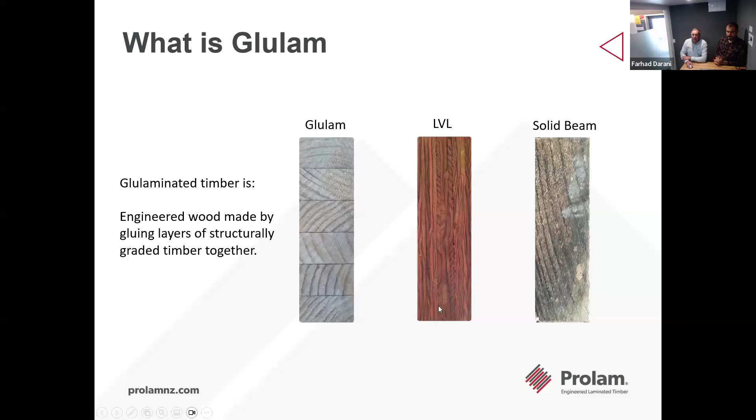So what is Glulam? Glulam timber is engineered wood made out of gluing layers of structurally graded timber together. So we've got a Glulam example here, we've got LVL, and then just our solid standard timber.

Just a bit on log procurement - logs are sonically tested to ensure the best recovery in the structural lumber. This tool has been developed in New Zealand. The speed of sound through wood provides a direct measure of stiffness. So we specify a log grade of 3.1 kilometres per second - that's the speed of the sound going through the log.

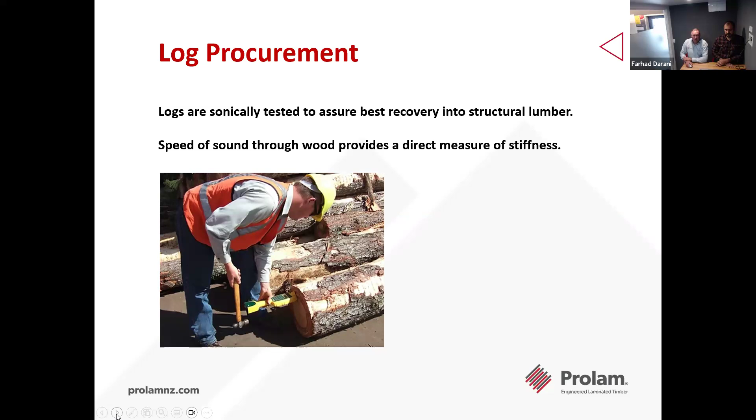Similar to LVL, they specify a high sonic log as well. Nelson, top of the South Island, is a really good place to get highly sonic logs, same as the top of the North Island. So we do have a great resource on our doorstep.

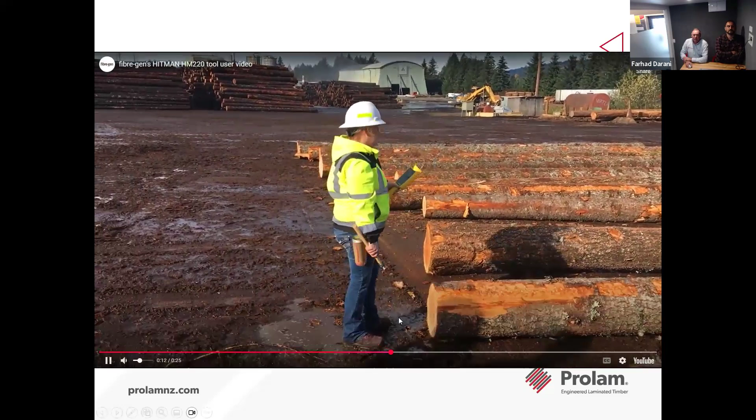Here's just a little video of them testing logs. They'll mark the logs with a different colour for the different grades - it's just a hit on the log and it reads the sonics through the tool, and away you go. So they'll mostly mark the high structural logs and separate them out and send them to the mills that specifically require the high density logs.

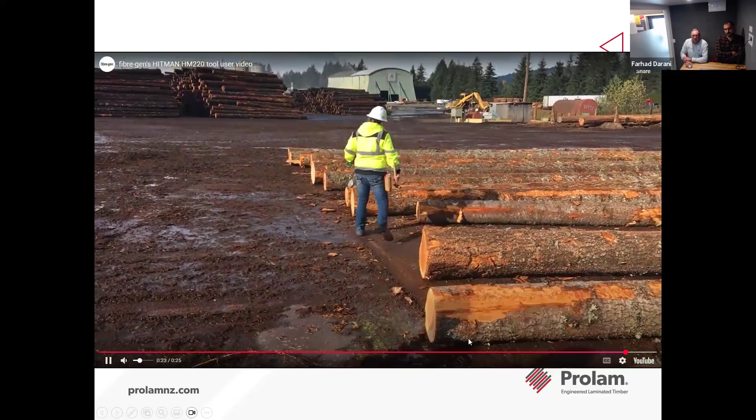Log processing, so logs are cut through a mill into the required sizes and then filleted ready for kiln drying. This is our little head rig here. There's a chipper canter here which grinds off the side of the log, and then our bandsaws in behind.

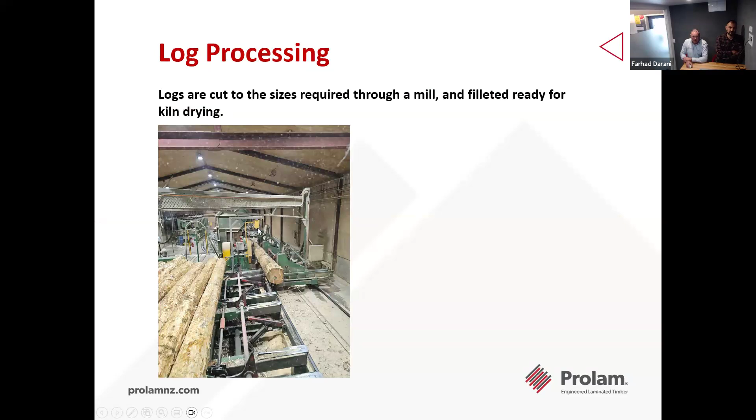Kiln drying, so our timber is kiln dried to a moisture content of 12 to 16%, either in a batch kiln or in a continuous drying kiln. This is a continuous drying kiln in here.

This is an in-feed, and it just has a hydraulic ram in the bottom that pushes that loaded timber through every half an hour. It pushes it about another 300 millimeters, so it gives it a real nice gentle dry, because in the first section of the kiln, it's got no heating coils, it's just got fans blowing air around.

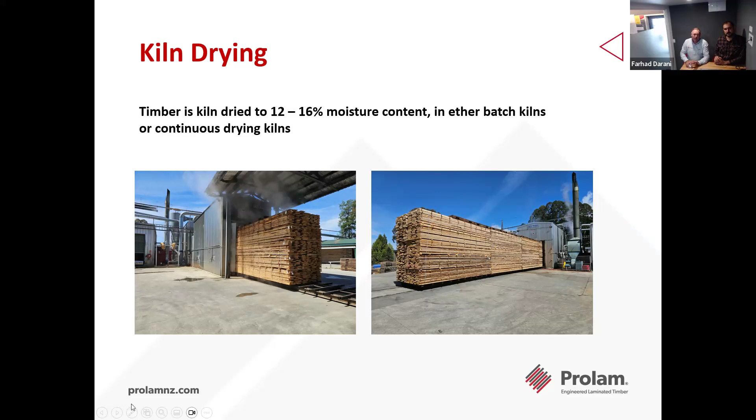There is a bit of heat there that escapes back out of the actual kiln drying portion of the kiln, so it warms it up really nice and gently, and same on the outfeed on this picture. You can see the steam coming out here, so that's where it reconditions the timber as it's on the way out.

Optimisation, so this is where we cut the lumber into specific structural and visual grades. We have SG 12, 10, 8 and 6. So number one, we put a structural profile over the board, then a moisture content profile over the board, and then a visual profile over the board. It's not till that point that we decide how we cut this board up to optimise the timber out of it.

So this is just a picture of the structural profile of a single length of timber. There's 37 points that are graded here, and every one of these bars is like 140 millimeters of that length of timber. So you can see the huge range we have in the structural portions of a single stick of timber.

And that's because we're dealing with a living product, as timber is. The highest grade here got up to an SG 17, and the lowest was an 8.9, but the average was a 13.35. So we cut out portions of that lumber, so everything above an 11.5 would go into SG 12, and then we'd pull some 10 out, and then there'd be some 8.

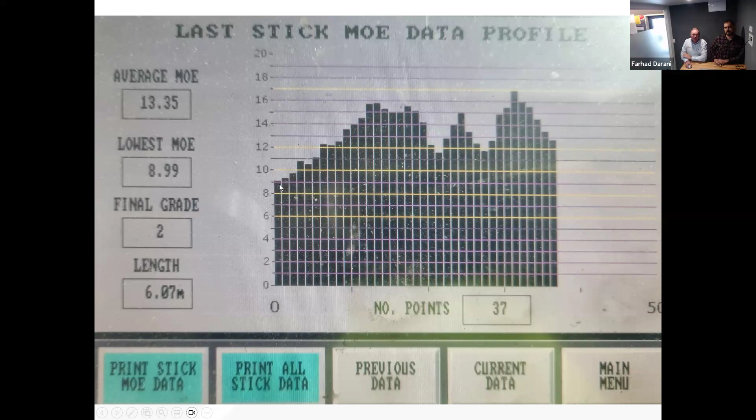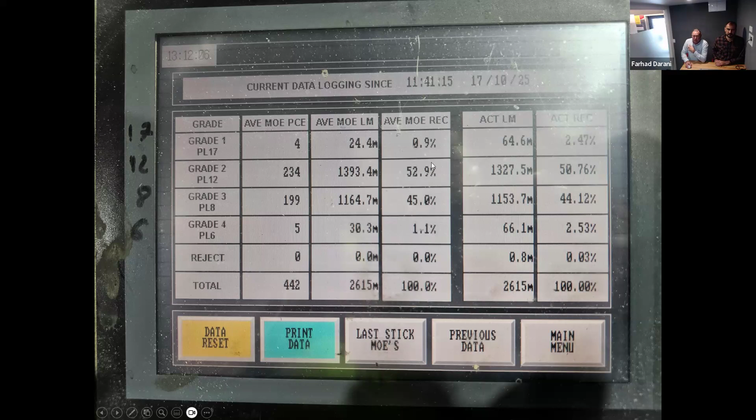And then this is the average of a run, so on this one here, we're getting 52.9% PL12, 45% PL8, and 1.1% PL6, and a tiny wee bit of PL17.

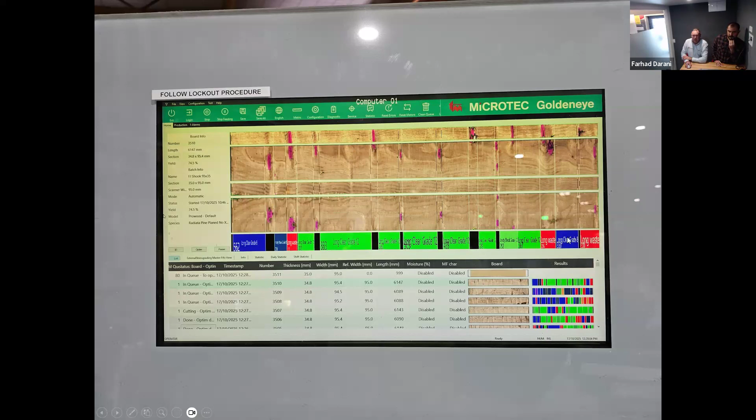And then this is our visual scanner. So this straight line LED here is picking up the visual grading of the board, whereas this dot grader here is picking up the grain deviation. That's really important for our finger jointing, because we don't want the grain on an angle no more than 12 degrees for finger jointing, to keep the structural strength of our finger joint where it needs to be.

So then we come to finger jointing. Timber of the same structural and visual grades are then finger jointed together to the correct length using glue for the correct service class.

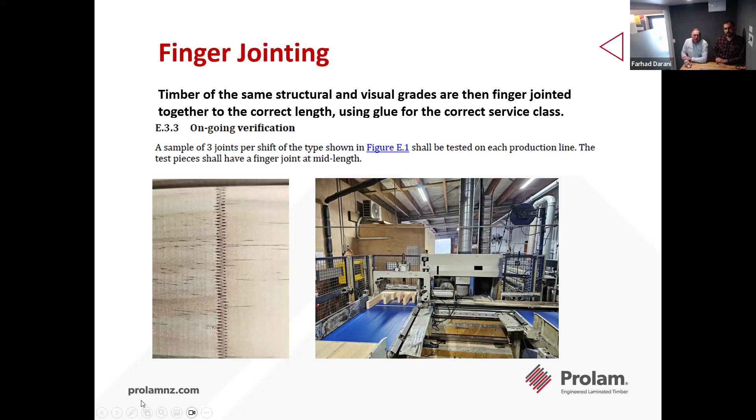So we do some ongoing verification here. We're sampling 3 joints per shift, and each is tested in each production line. So I've just got a little bit here on our production record.

These are the records we keep every day for our quality control: date, species, grade, moisture content, the resin type and hardener, the manufacturer of the glue, the batch number, expiry date, the service class type, clamping pressure on the finger joiner, adhesive spread in grams per square meter, service class, and then a gel check. We use a 2-pot glue, so we do a gel check on the glue every day to make sure the batch is going off.

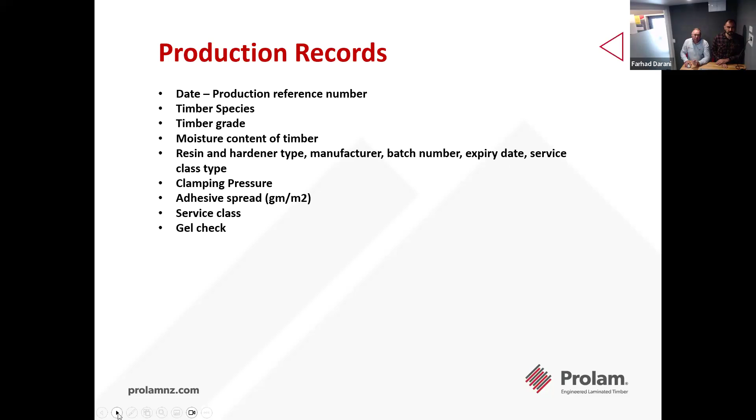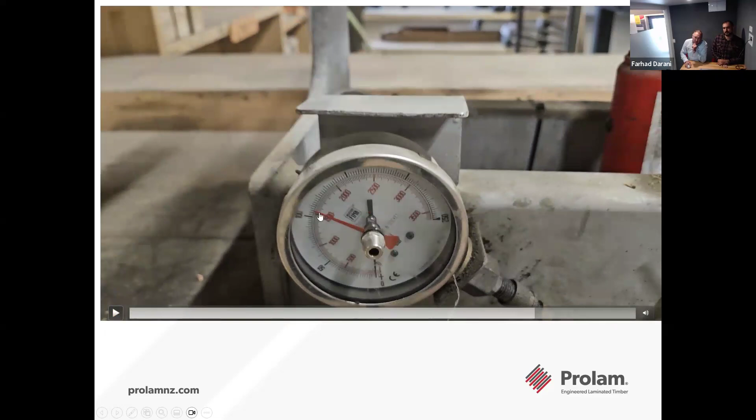And we have our chart up here.

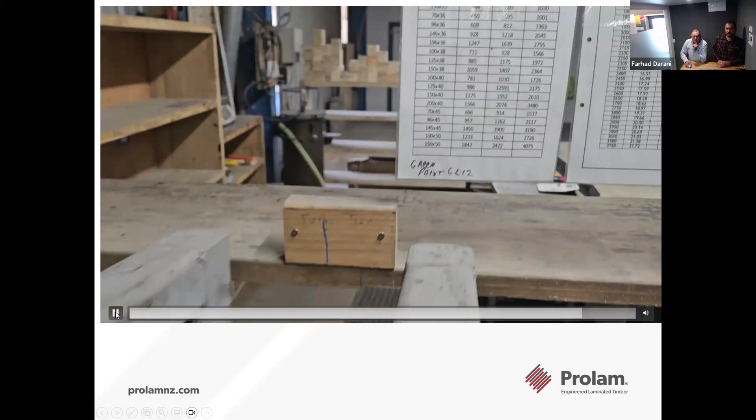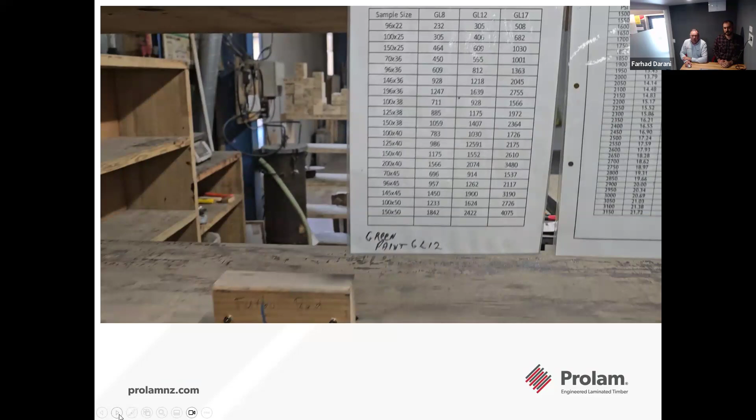So that size was 96 by 36. For the GL8 grading, we needed to break at 609 and we broke at 1500. So that just shows that we're above, quite a bit above where we need to be for our breakage.

Coming to treatment. Timber is treated in a pressure vessel to the required hazard class. So we've got MCA or CCA for H3.2, H4, H5 or H6, and then we have the boron treatment for H1.2.

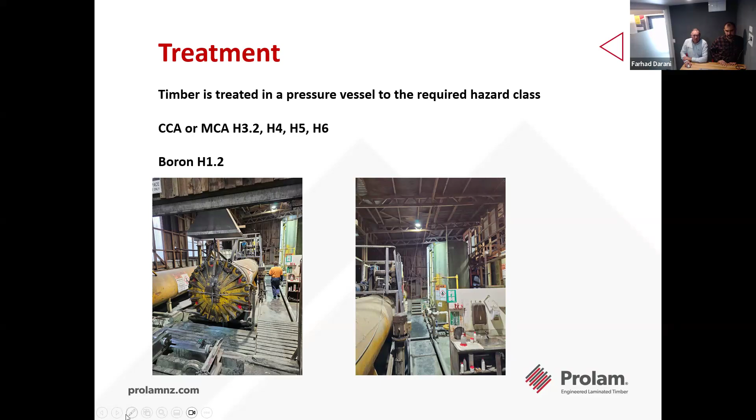So these are the pressure vessels here. These are the working solution tanks that get pumped into these vessels with the timber in it. And then that's our compliance report we get from IVS. For every 30 charges we put through, we have to do a sample test of 10 boards.

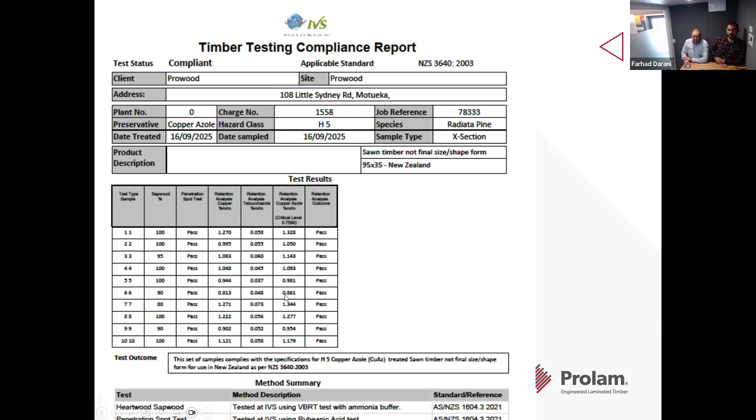So these all passed here, and the minimum we're allowed for chemical uptake is 0.75. So we always aim a little bit above where we need to be there.

So this is a treatment penetration test. This is looking for penetration of the chemical into the blocks of timber.

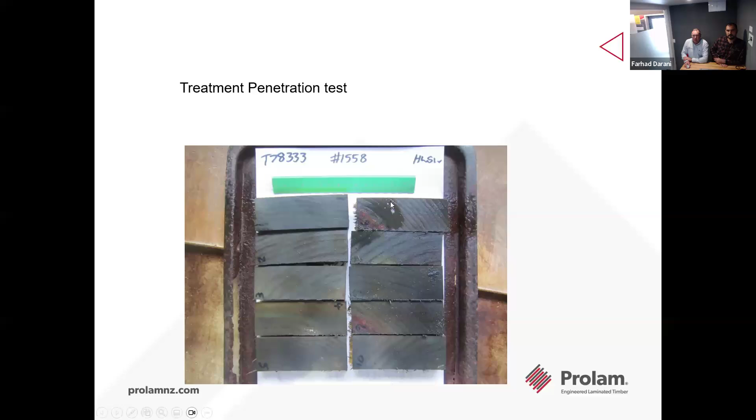And then this is looking for heartwood and sapwood. So they've marked where the heartwood is here, or more like transition wood, really.

And then we have to re-dry the timber after it's treated. So we're re-drying it back again to a moisture content of 12 to 16.

And this is a little overview of our continuous drying kiln. So this is your preheat end coming through here, and this is the proper kiln section in the middle here, and then a conditioning section on the way out here.

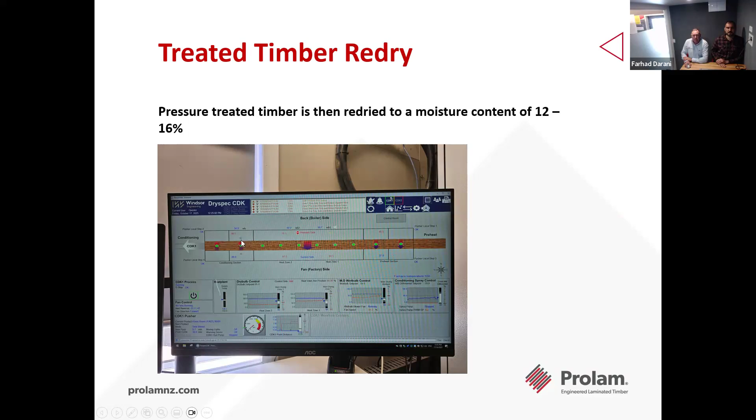Coming to lamination, finger jointed blanks are then machined, glued and clamped for the required length of time to cure the glue. And these are just a few examples of different ways we can laminate.

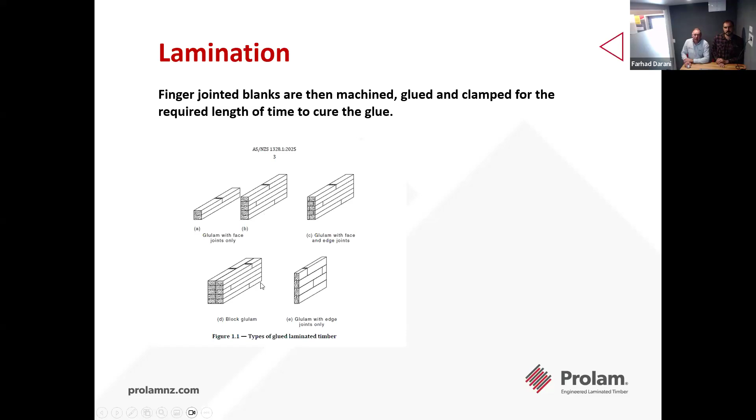And then, so our production records for the lamination process are fairly similar to finger joining. We're taking thickness of the laminations, the moisture content again, resin, the start time of the adhesive application process, and the start time of clamping.

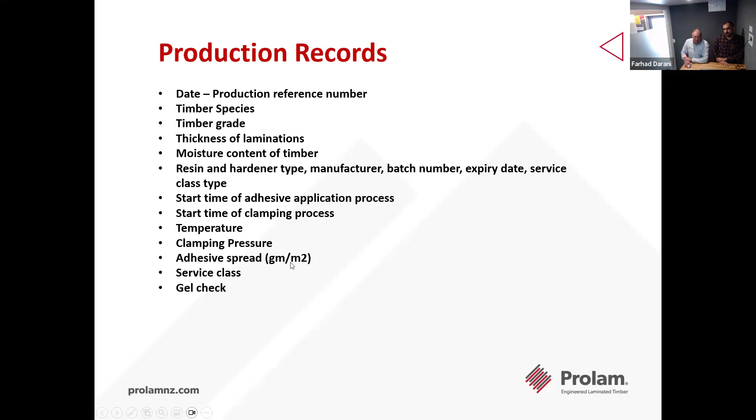So that's quite critical for us because we're using a heat cured glue. Depending on the temperature of the day, we've got to get it into the clamps within a certain time period. So we're taking the temperature as well, clamping pressure, adhesive spread, service class check, and a gel check again to make sure the glue is correct.

Just a bit on standard. So this is the old standard that had the adhesives in there, and it showed the service class 1, 2, and 3. Class 1 is for interior, class 2 is for exterior but protected, and class 3 is for exterior.

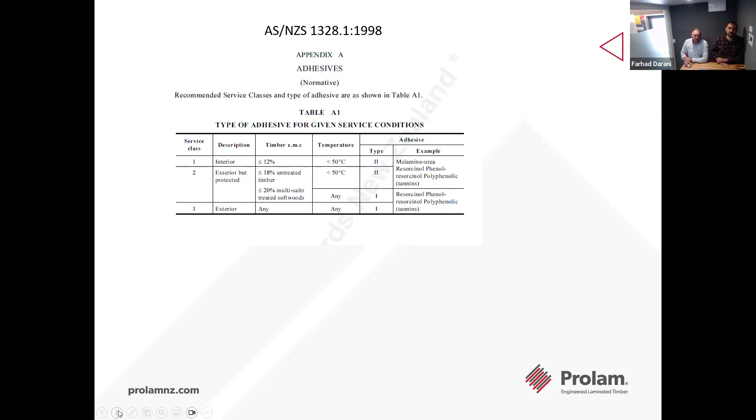And then it brings you moisture content and what have you there. So, bond integrity test method.

So this is for lamination. We're using, most of our product is service class 3, so we're using the delamination test method B, Appendix A.

So this is the test cycle. I won't bore you with going right through that, but essentially we have a pressure vessel where you fill it up with water. We put the timber in there, we pull a vacuum of 70 kPa to 85 for 30 minutes, and we release the vacuum and then pressurize it. And then we dry the pieces in an oven, and then we count the delamination from there.

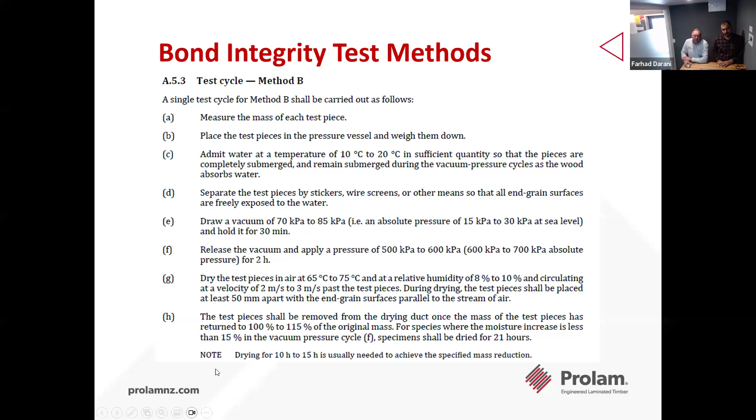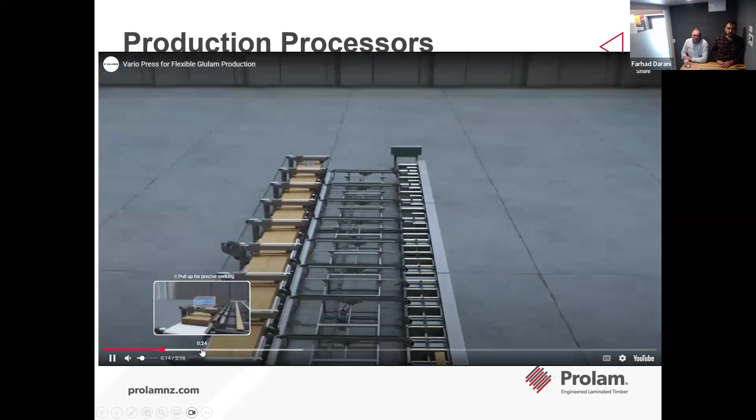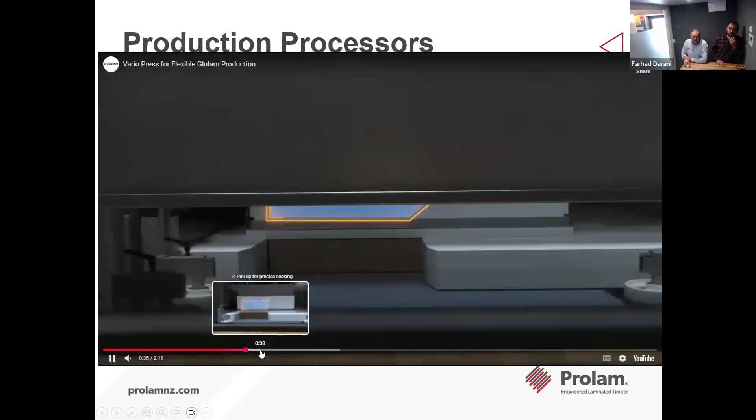I've just got a few videos here of different laminating processes. So this is a radio frequency press, which is what we have here at Prolam. It's laying up the timber on the infeed, and that's in the press here now.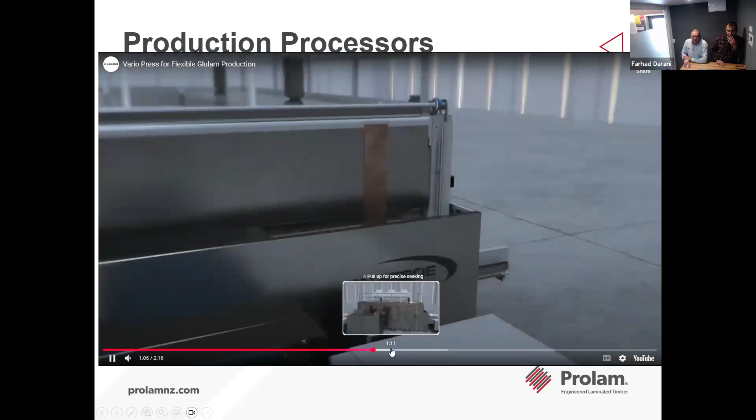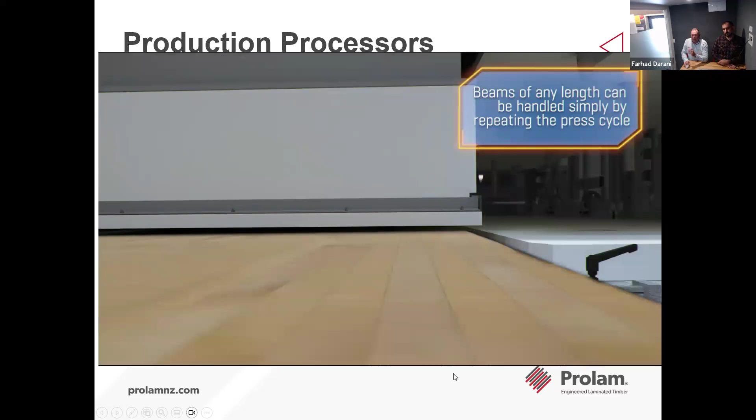Then this is the RF energy, just shows you a bit of the RF energy going into the press here to cure the glue. So it cures the glue, it's a bit like just a big microwave. It works on vibrating the water molecules into the glue and curing the glue, so it's not actually heating up the timber.

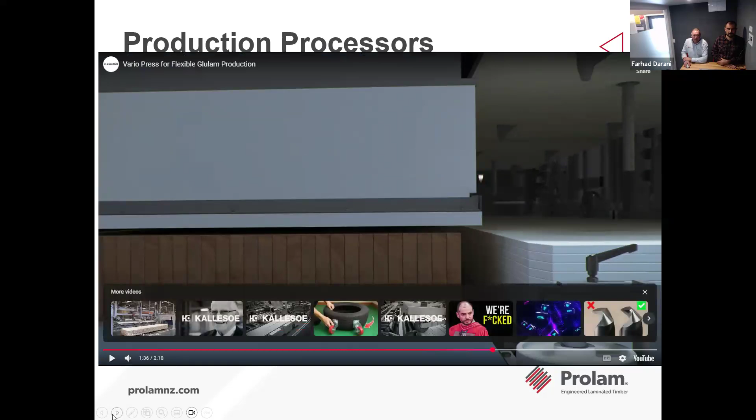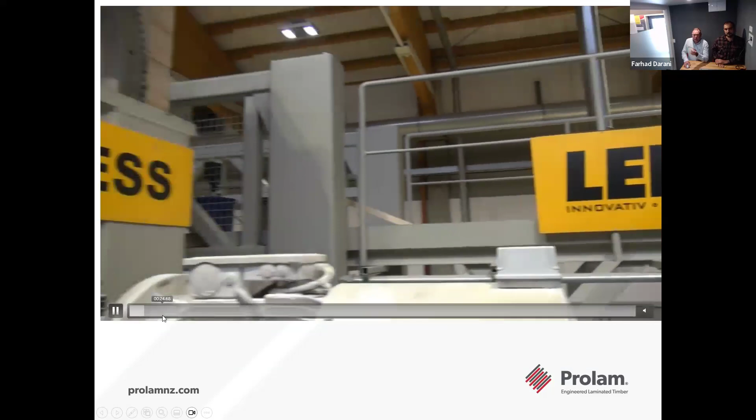This is another one from Ledinek. This is a cold cure press, it just cures the glue at the temperature of the room it's in, so feeding timber through a glue spreader.

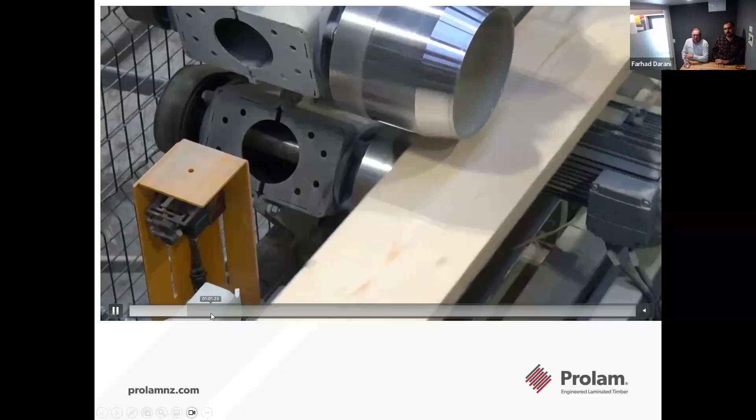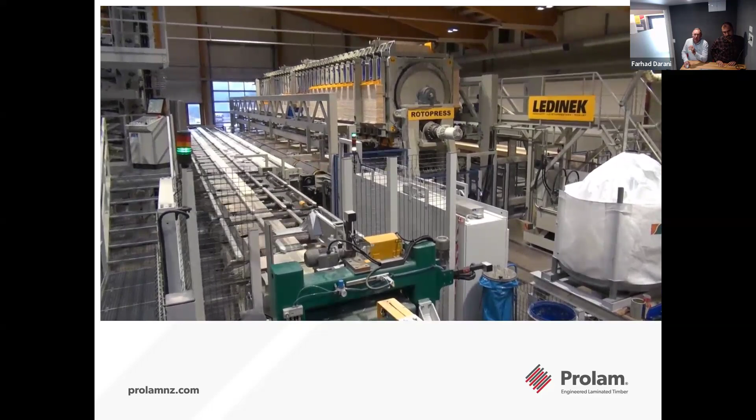It's fairly fast because these guys were using PUR glue, which is very fast setting but also has a very short open cure time. So you've got to get it into the press very fast and clamp it very fast.

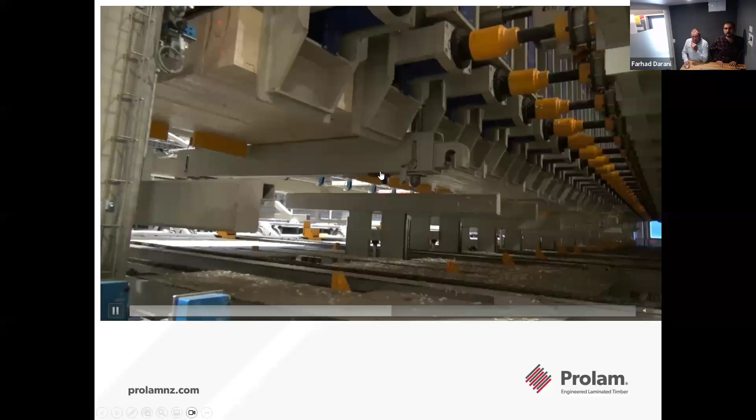So this is unclamping now. Oh sorry, no, that just finished clamping. So now it's turning this whole cylinder around, and the one on the fourth side, which will be coming onto the bottom, will have been fully cured.

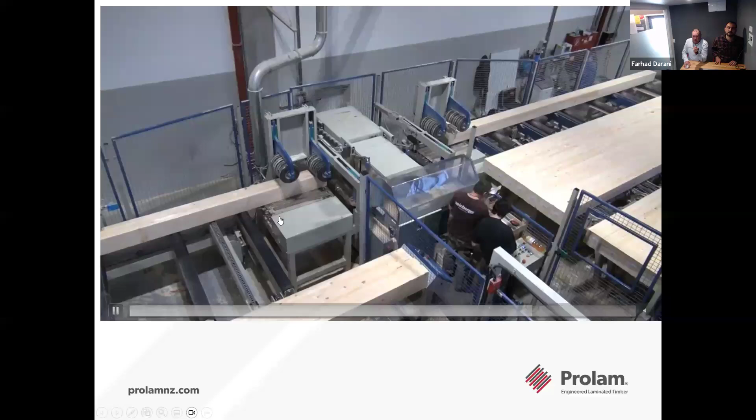This is the finished beam, or finished beams, coming out of the press and getting trimmed to length here, and then going down towards the finishing planer, like so.

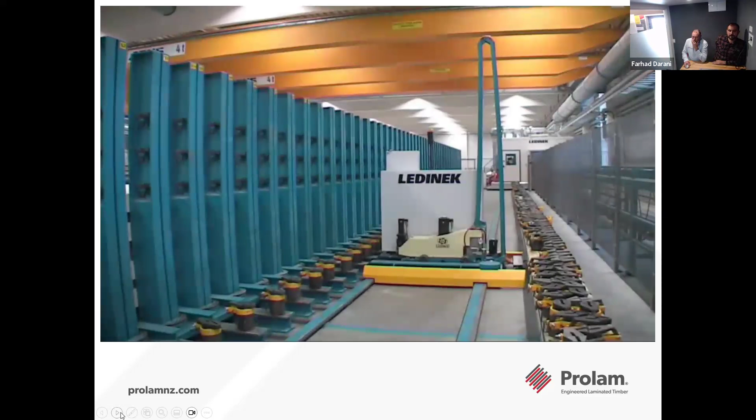So this is a different press. This is how they do curved beams. It's quite a long video, you better come back and look at this in your own time. But this is pushing the pillars into the right curve to make a curved beam.

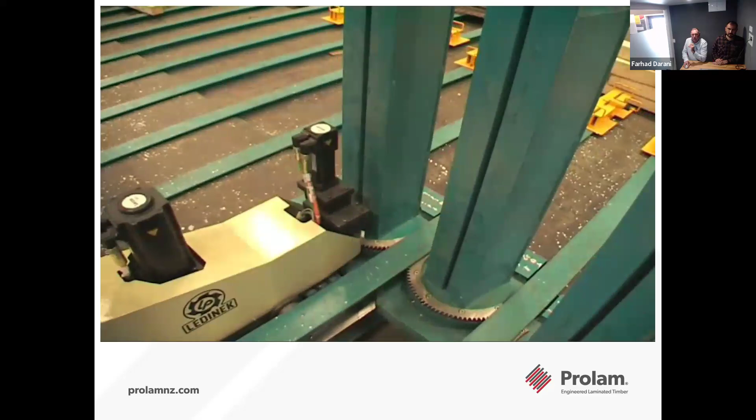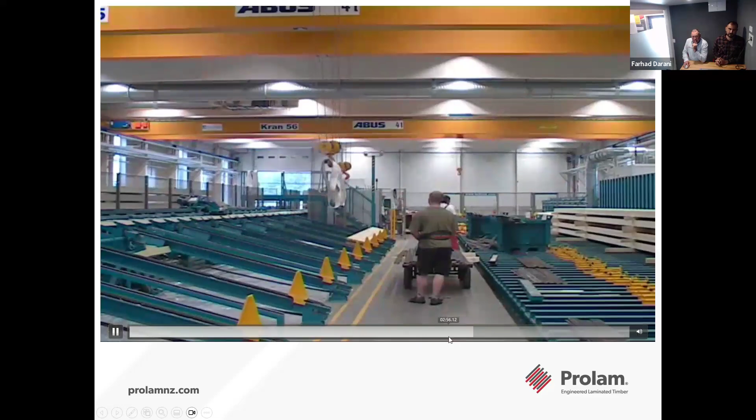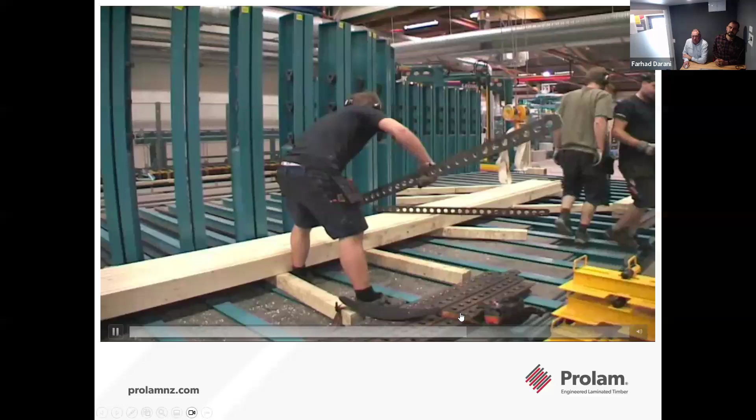This is building up the lamellas. So bring them into the press, and then curving, pulling that round with hydraulic clamps. Quite labour intensive - there's no real easy way to make curved beams.

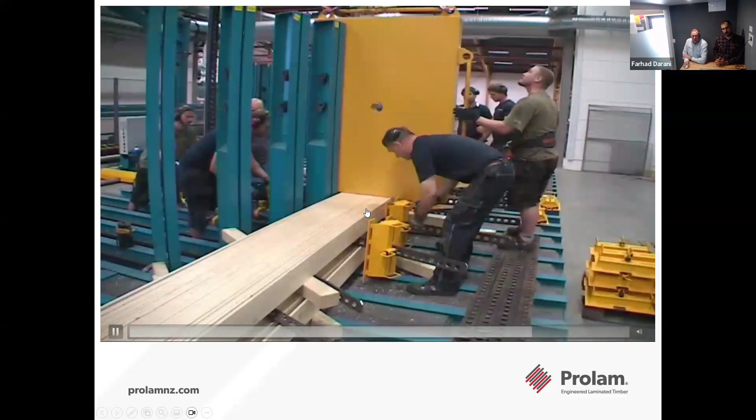See here they are doing up the bolts or the clamps, flattening the beam out and pulling the pressure on the beams.

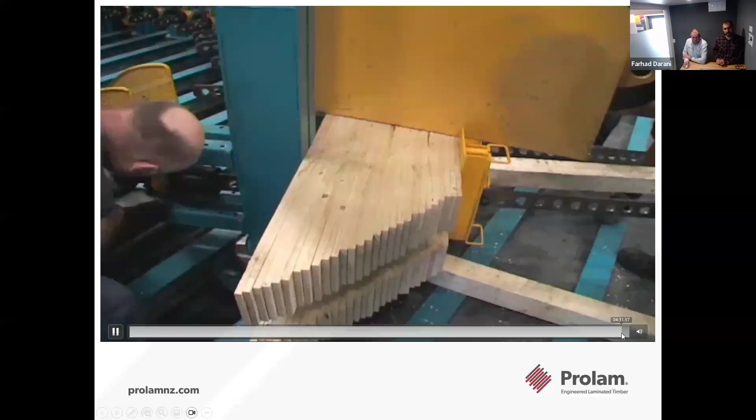Remachining - so after those processes, you've got your final Glulam products machined to their final size. There's a few different machining finishes: most beams will be just machine finished, but we can do a bandsawn finish, sanded and sealed, or pre-primed.

Just a bit on durability - Glulam timber is highly resistant to moisture and fungal decay, making it long-lasting and low-maintenance. We can treat it from H1 to H6.

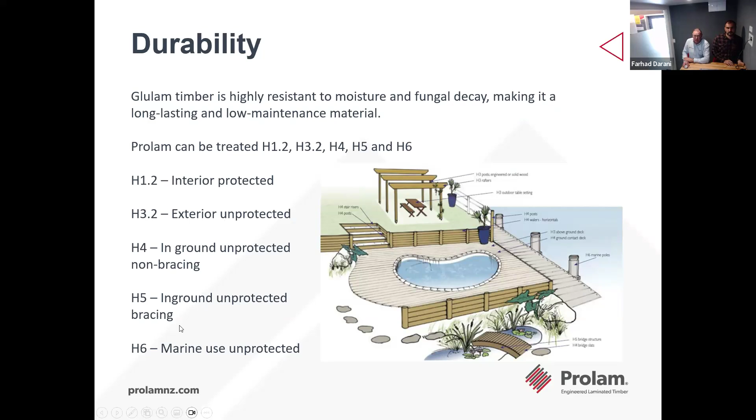So you've got your H1.2 for interior protected, H3.2 for exterior unprotected, H4 for in-ground unprotected non-bracing, for things like fence posts, then H5 for in-ground unprotected bracing, for your decks and pergolas, and H6 for marine.

So a few treatment options out there. You've got MCA, micronized copper azole, which is a more environmentally preferred product nowadays, using copper only, whereas what we're most used to in New Zealand is CCA - copper, chrome and arsenic. Then we have our Frame Pro, which is our boron treatment for H1.2.

Just a few of the standards we're operating to currently: AS NZS 1328:1998, plus a finger joint standard, and our preservative treatment standard.

Structural properties - this comes out of the old standard as well. Now we don't actually have to make Glulam to any specific standard, and I mean in MOE, but this is what was in the 1328:1998 standard, which is what we're running to currently. So our GL8, GL10 and GL12.

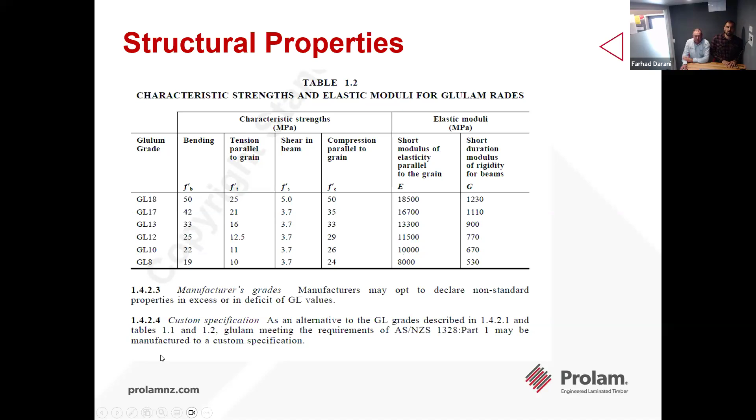This is for verandas and big project beams - you'd have a visual grade. Non-visual is where we use it for things like deck bearers and deck joists, where it's not seen, or just standard house lintels.

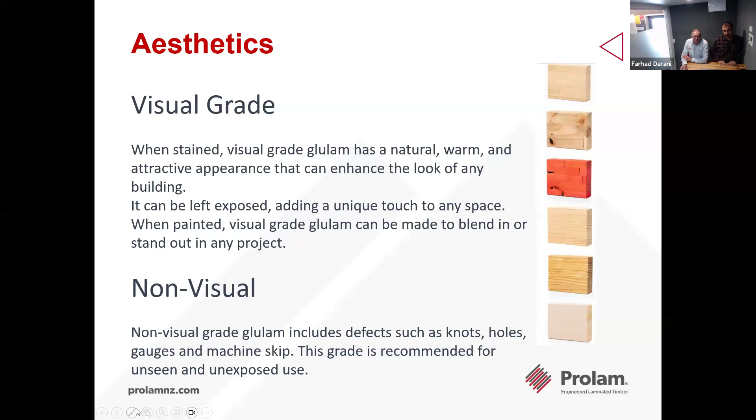Thanks Farhad. Yeah, thanks John. Hi everyone. So actually, John and myself were supposed to do this presentation separately from different cities, one from Nelson and the other from Wellington, but because of the power outage in the top of the South Island this morning and then flight cancellation to Wellington, we ended up doing the presentation from the same room.

And let's hope that everything with controlling the fire in Kaikoura goes well and not many people are affected by that situation. So I will be discussing a little bit about...

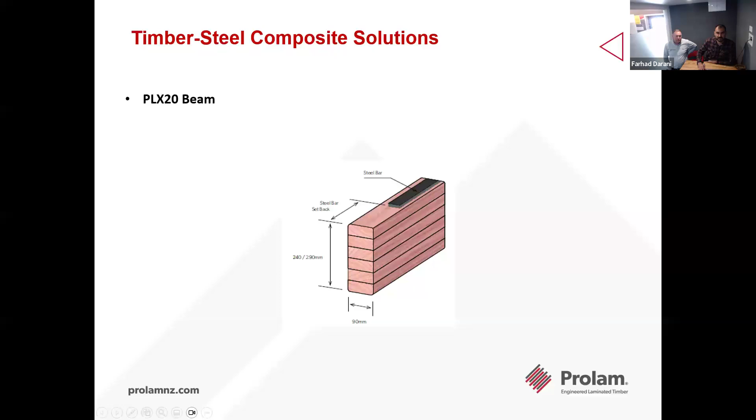And then there are some side products actually using the PLX20 concept that we have been using and proposing to the market as well. So these are different configurations that we considered at the beginning for developing the system.

We were aiming to have something which offers suitable strength and stiffness. For example, we have a bending stress of 40 MPa and 45 MPa for two different products, one being 240 by 90 and the other 290 by 90, and an increased modulus of elasticity of 20 and 21 GPa.

For the rest of the structural characteristics, like tension and shear, we used GL6 structural characteristics, which is the timber used in the PLX20 range.

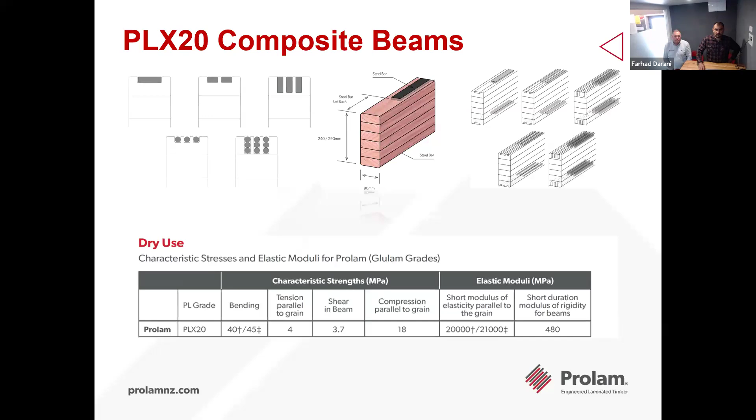So, different development stages that we went through. First was how we want to glue the steel to the timber. We used a high-performing epoxy, and did different development length testing and surface preparation testing to make sure we get enough resistance out of the connection between the steel and the timber.

For example, this is a development test that we did in Scion to come up with the best surface preparation and measure the shear strength that we get at the surface between the steel and the timber.

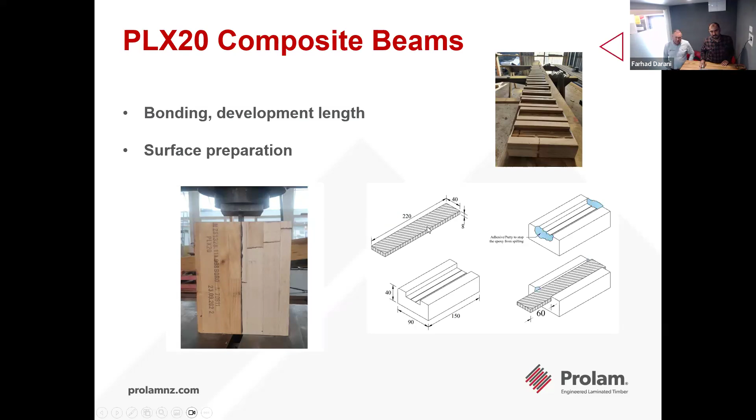We also did 4-point bending tests based on NZS 4063, just to measure the stiffness and the deflections.

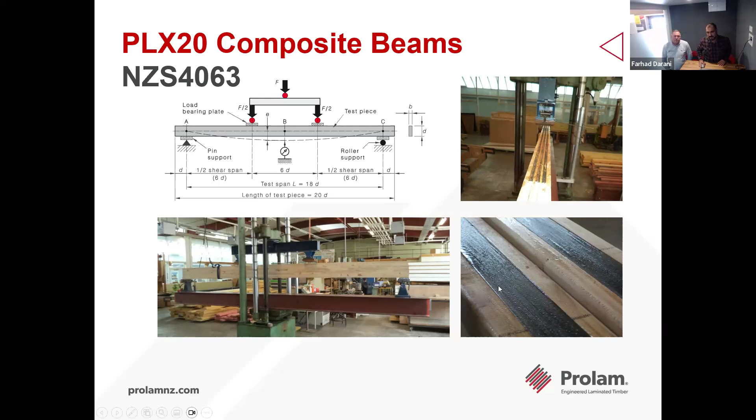You can see here we tested two different variations: one with 3 steel rods inserted and epoxied to the top of the beam, and the other a simple rectangular steel bar. After these tests, we decided to go ahead with the rectangular section only, and then we did some strength tests as well.

What you can see here is a good consistency in the results for these different samples that we have tested, both in terms of stiffness and strength.

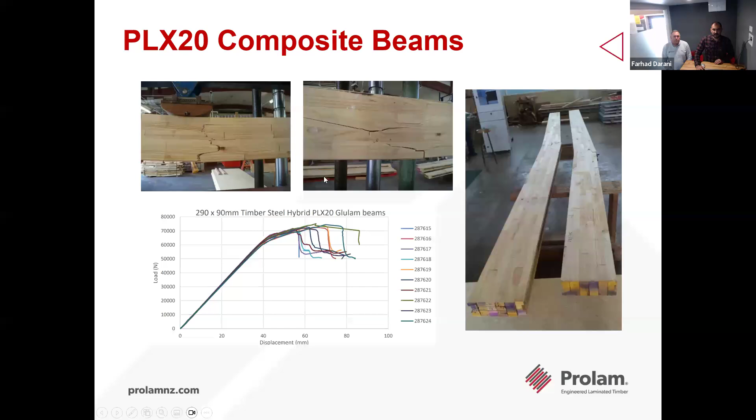You can see there is a bit of ductility as well, so you don't get a sudden brittle failure, which is a good point of difference between this composite beam compared to simple Glulam beams. This is good for collapse prevention or life safety aspects when we consider those in our design targets.

One of the main objectives of this test has been measuring the creep deflection factor for the PLX20 beam, and the results have been very good. The composite section has been performing very well.

We backed up that experimental observation with analytical procedures, using a K2 long-term deflection factor of 2 in our assessments. For the composite section, we came out to 1.26 and 1.23 for our two different PLX beams, which means it performs better even analytically compared to 1.5, currently proposed in the standard.

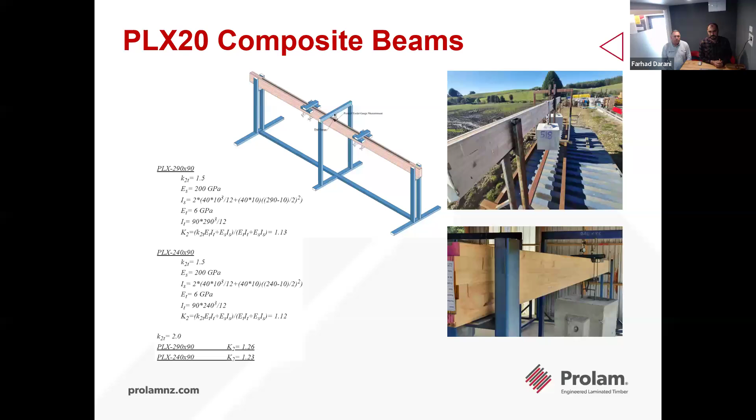We have done some other development tests, specifically for services. There are standard small holes through the beams made during construction, but we have had queries from architects and builders asking if they can make bigger holes into the PLX20 beam, so we have done different tests.

We did a test with a 150 millimeter hole at the middle of the beam, and the performance was very good. The stiffness and strength of the beam was not much affected, as expected, because the failure is governed by flexure. We then did another test with holes very close to the end supports.

For holes near the supports, the failure was governed by shear, so we now have a very good understanding of the shear resistance of the beam. At the moment we are working on a guideline for which diameter and location holes could be relative to the end supports.

If we need to get too close to the supports, we can add some additional steel plates for reinforcement.

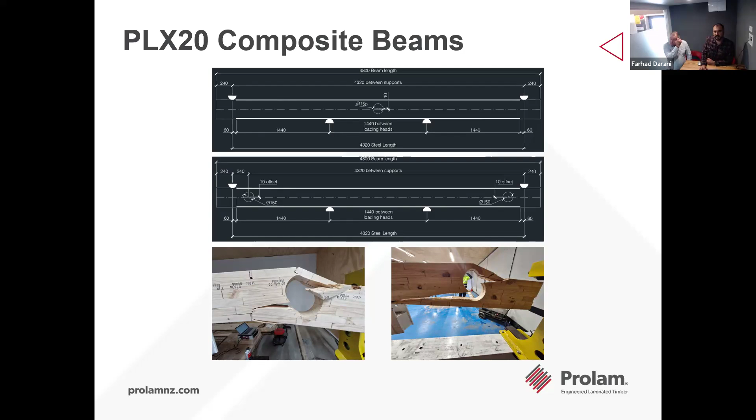We have also developed a numerical model for capturing different failure aspects of our composite and Glulam beams, predicting the flexural and shear performance, so we can use it in our designs, either for product development or for specific design queries we want to look into in more detail.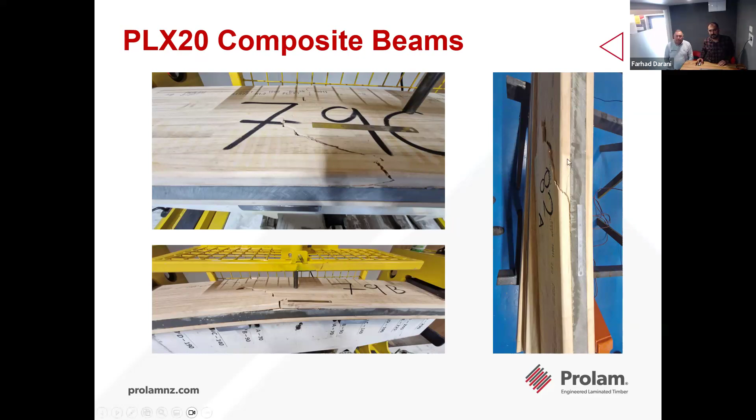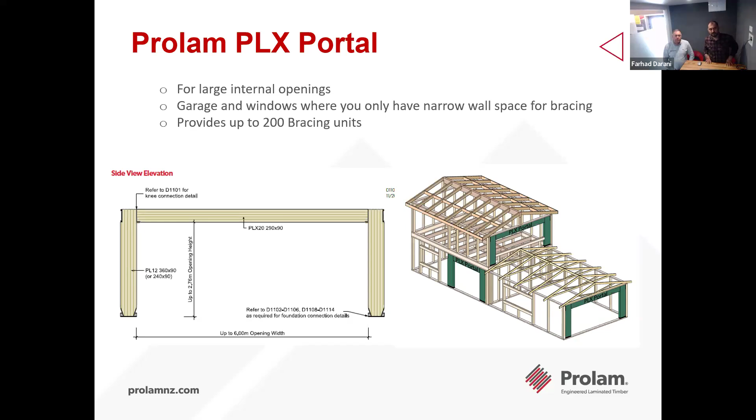Based on the PLX20 beam, we focused on some specific solutions based on demand in the market and requirements from the industry. One of them is the PLX portal, or bracing portal, which uses the PLX20 beam as the beam or lintel, and then two PL12 portal legs at either end. The objective for this development was to have a solution that is easy to manufacture and easy to install on site, so it's not too labor intensive. Builders don't have to involve fabricators and welders, which actually works well in the construction process. So this is the development process we went through.

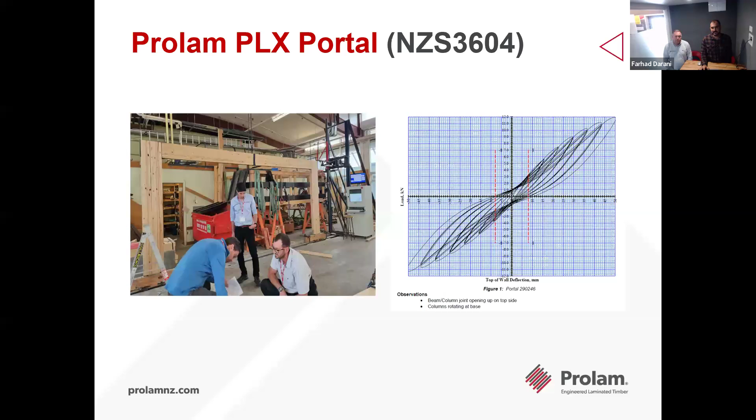We aimed for two different variations. One was for 3604 applications, and this is the test that the team has been doing for our off-the-shelf solutions to come up with the lateral stiffness and lateral strength. We have also developed some SED variations, for example when there are specific design target requirements such as SLS or ULS deflections or SLS and ULS capacities, so we can work with the engineering to their specific requirements and come up with a design that meets those requirements.

So this one here, for example, we have combined a PLX20 beam with a PLX20 with steel bars as well for the portal legs. And we have got a good performance in terms of the ductility achieved for this specific design.

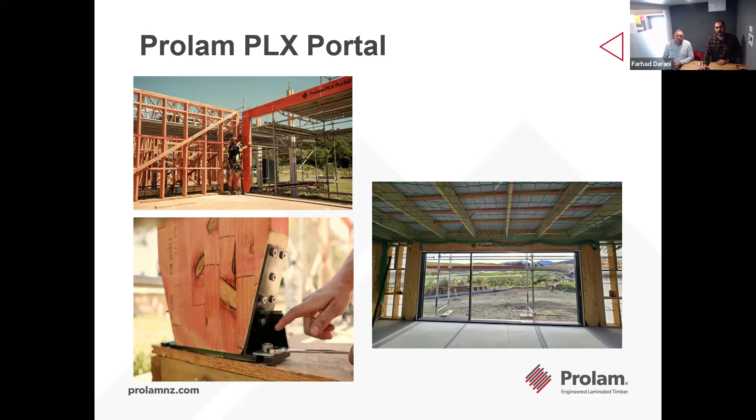As I said, it's easy to install on site. You don't have too many people on site, maybe 2 or 3 people, and they can install the portal frame within maybe 2 to 3 hours, which saves a lot of difficulty and time on site. The whole package is delivered to site, which is in line with the concept of prefabricated construction and modern methods of construction, specifically looking into the residential market, which sometimes involves not-too-efficient processes, but we have been trying to make the process a bit more efficient and contractor friendly.

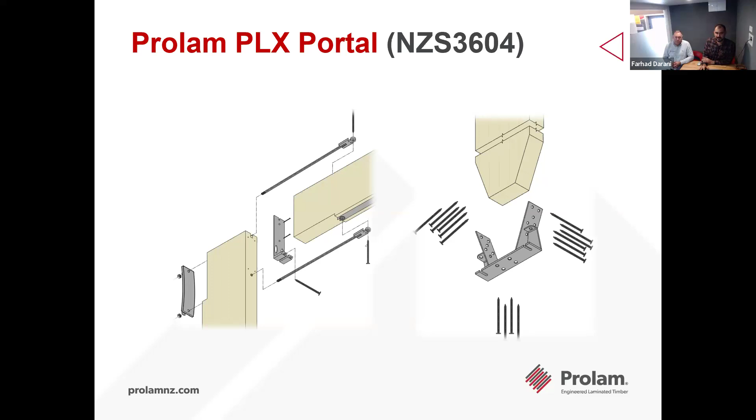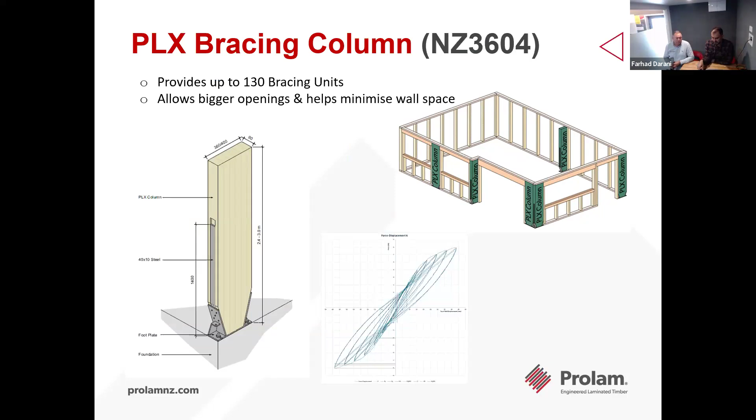Another product developed based on the PLX composite concept is the PLX bracing column, somehow similar to the portal, but the difference here is that the fixity comes from the base connection. Again, there are development tests and performance tests that we did for this concept, and there are two different variations we've been looking into using the bracing column. One is for 3604 applications, and the other, recently developed, can be designed based on different engineering needs in terms of deflection and strength requirements.

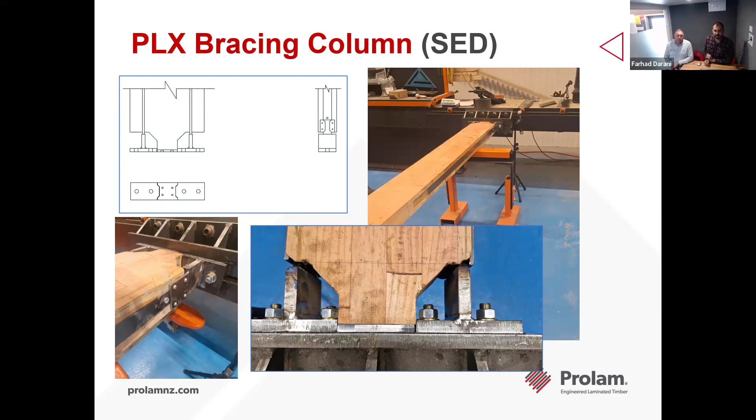This one here is a concept we recently developed and tested successfully, which involves a ductile link. What we have used is a steel bar connected to the column, which gives enough bonding strength, and we continued the bar into the fixing at the bottom with a neck portion at the bar, directly connected to the base. The benefit of this concept is that it deals with lots of other complications in terms of timber connection designs, such as cracks and crushing, so we don't get that kind of degradation of stiffness and strength and pinching in the behavior of the column. This shows the force displacement graph of the concept we tested.

We can see that we have a very consistent and repeatable ductile performance achieved for a timber structure, for a timber element, which covers those more complicated behavioral aspects of timber, specifically when it comes to ductility and resolving ductility through timber connections. I think this concept has been working pretty well.

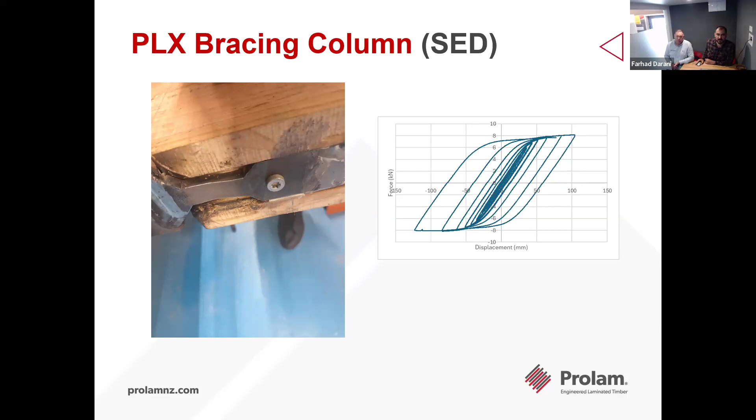So this is a short video showing the test that we have done for the concept.

So the steel bar is actually being stretched here, the neck portion, and it provides the energy dissipation and ductility for the system.

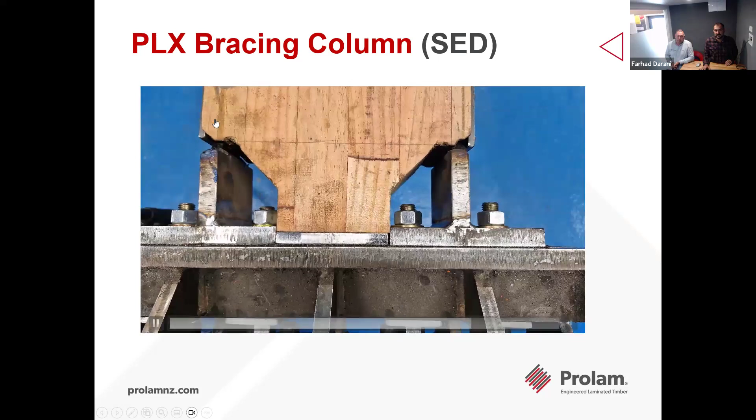This system is developed mostly for the PLX portal and PLX column, mostly for residential applications. One of the queries we usually get from the industry is about challenges and difficulties in achieving the required edge distance of the anchors.

So we developed this anchorage system that goes in at an angle into the foundation, which resolves the edge distance issue. We've done some pull-out and shear testing to measure the resistance of the anchor. One thing to note is that we've tested and developed this system mostly for 3604 applications, based on the performance requirements for residential buildings.

But if you're doing a specific engineering design and want to achieve higher performance, such as C2 requirements for post-installed anchors or stricter design objectives, this system is not developed for those. You'd need to go through your own specific engineering design—for example, using cast-in anchors and chapter 17 of 3101 for designing the anchors.

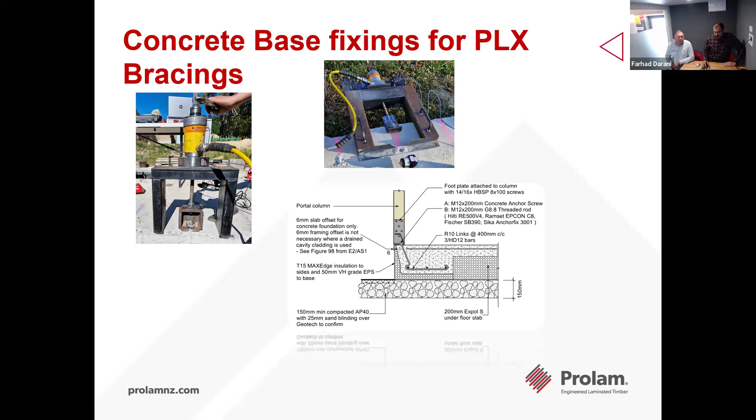I think that concludes my presentation. My last two slides show some other applications of the Glulam products, like bridge applications, where we're able to achieve the performance requirements for resistance to loads and also for durability requirements.

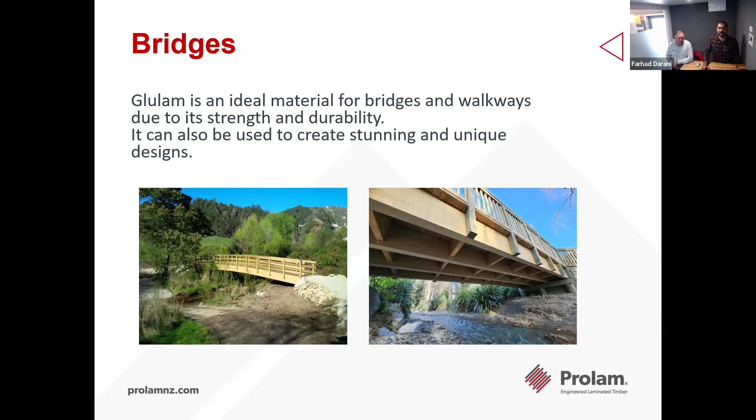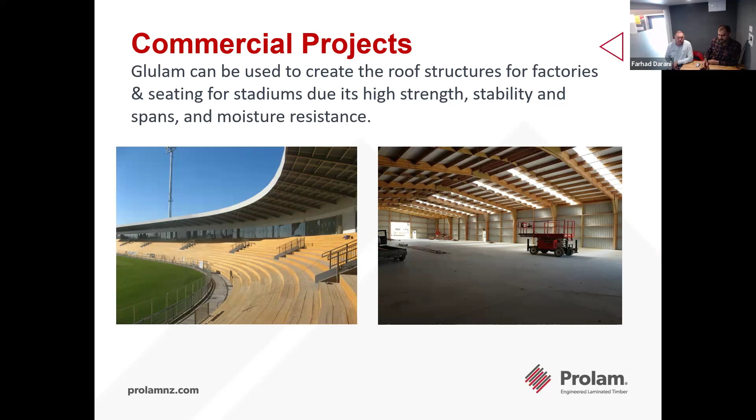So that concludes our presentation, and we'll be more than happy to answer any questions you may have.